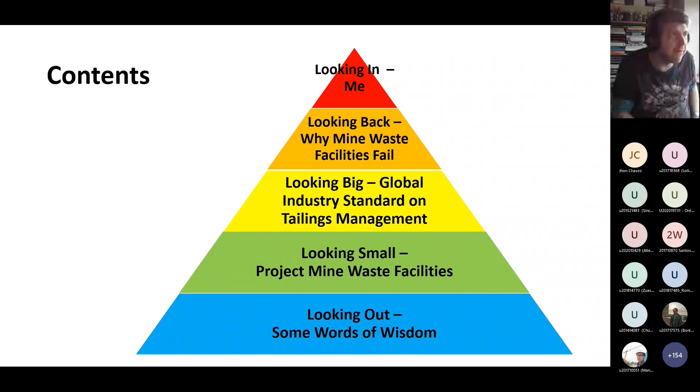I'm going to talk a bit about myself, an informal introduction, so you know I'm not just an engineer. I'll look back at why mine waste facilities fail, a bit about the global industry standard on tailings management, then why projects have mine waste facilities, and some words of wisdom I've picked up over about 25 years of experience that I'd like to pass on to you younger ones. You can use it on any geotechnical project. I thought it might be useful to pass on a bit of my grey hair to you.

A bit about me: I was born in 1971 in Northern Ireland. I grew up in Cornwall, a historical mining area in England, which had copper and tin mines, mostly underground. I moved around England and graduated in 1995 with a 2-1 degree from Camborne School of Mines. I'm married with one wife. I live in Kent, in Ashford, near London.

I'm called something in the United Kingdom a ground engineering professional. I'm a chartered engineer and a chartered geologist. I love football - my team is Liverpool. I love Liverpool, and I love science fiction, especially Star Wars.

I'm a geologist and I'm an engineer, and an engineer and a geologist see things very differently sometimes. An engineer sees things in numbers, a geologist sees things in pictures - very different mindsets. A geologist thinks a lot, an engineer likes to tinker around with problems. Geologists like uncertainty, things they don't know; engineers like order. So this helps me when I'm doing tailings management - I have to see both sides of the picture.

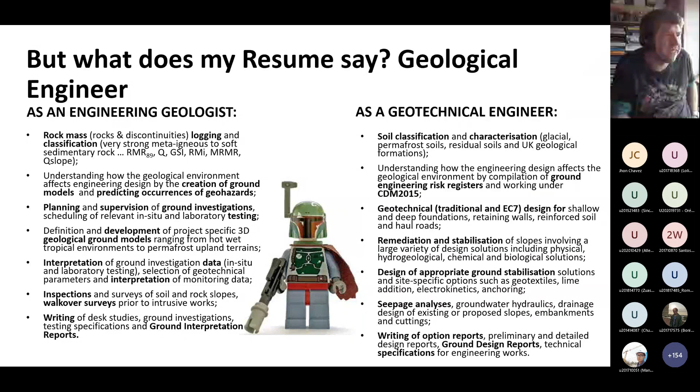As a geological engineer, I've done all sorts of things in my career: rock mass classification, planning ground investigations, ground models, remedial works, foundation design, piling, foundations, risk registers, seepage analysis, site supervision, writing reports - a bit like Boba Fett. We call it in the United Kingdom a jack of all trades.

I graduated in 1995, did some research into clay deformation and pastes and how they behave, did logging, worked in labs. Then I specialised in mining geotechnics, working on open pits, tailings dams, waste dumps and haul roads. I'm now specialising in risk and mining geohazards with Knight Piésold again - I joined Knight Piésold originally in 2001, left them, and now I've come back. I've specialised in mining geotechnics for about 20 years, and mining tailings dams for about 20 years.

But as I say, now I'm really focusing on the risk aspect. This talk's going to cover tailings dams in general, and the global industry standard on tailings dams - so looking back at why mine waste facilities fail.

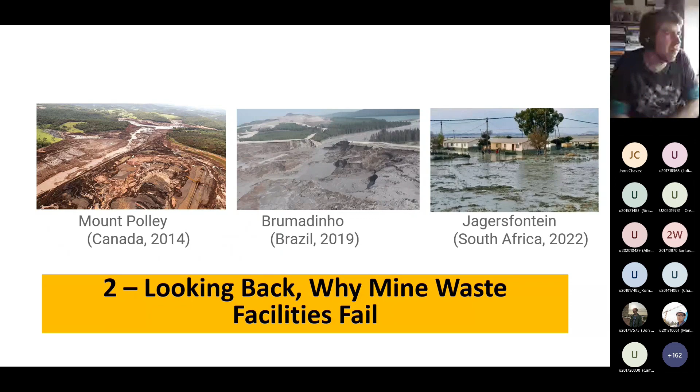We've heard all these stories in the press: Mount Polley in 2014, Brumadinho in 2019, and Jagersfontein in South Africa only this year. These are tragic cases, and we don't want anything like this to ever happen again.

So what are tailings? Tailings are the materials left over from the process of separating the valuable fraction from the uneconomical fraction - that is, the mine waste from the ore. They generally include fine-grained particles, chemicals, minerals, and water. Depending on the type of mining, tailings can be a liquid, a solid, or a bit of both.

Tailings characteristics can vary from project to project and deposit to deposit. It depends on the ore mineralogy, the host rock geology - it could be an oxide, a sulfide, a carbonate, or native minerals like gold or occasionally silver. The tailings characteristics can also depend on the ARD, the geochemistry, how high or low the pH is, if it's oxidized or reduced, and on the physical and chemical processes used to extract the valuable minerals - for example, if it's got cyanide in it, that affects the tailings characteristics.

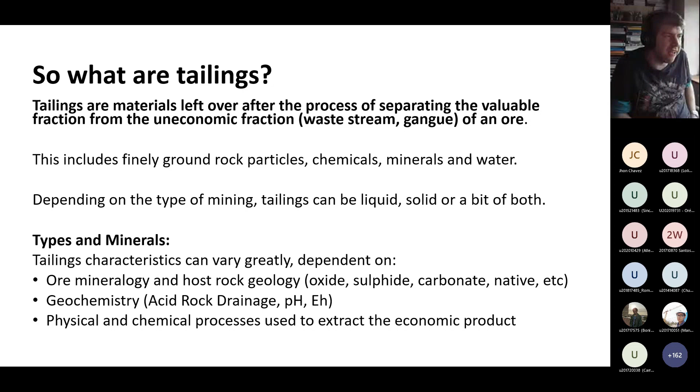As I said, we've seen all these cases in the press. When you've seen one tailings dam failure, you've only seen one. It takes more than one specialist to see why they went wrong, but there's no one solution to fit it all. We have to look at them individually, case by case. And when we design them, we do exactly the same. We can't just say we've worked on one project and copy it onto another. We can use ideas, but we can't copy everything word for word.

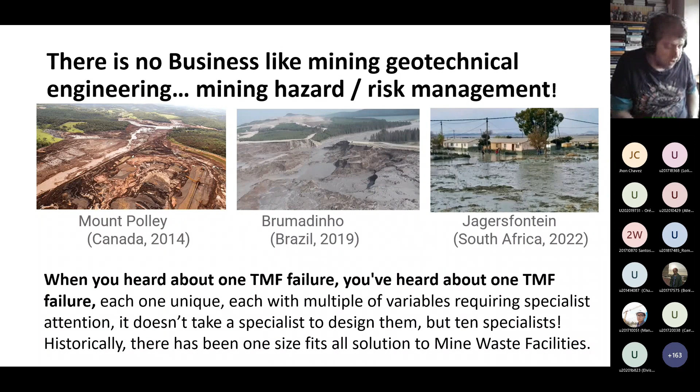So when you hear about tailings, where do you hear your news from? Do you hear it from your friends? Do you go to Google where everyone's talking about it and saying how bad tailings are and how bad mine waste facilities are? Or do you go to some unreliable sources on the internet saying again mine waste is bad? Or do you go to trusted sources?

There's a really good website I'd recommend to anyone interested in finding out more about tailings news. It's called Tailings News Alerts. They print about a monthly newsletter about all the news about tailings in the world.

So what makes tailings management facilities unique? Well, if you compare them to water retention dams or something like a reservoir, they're very different. Water retention dams, or WRD, the owner has a substantial amount of resources, that is, a lot of money available. They're viewed as useful, they're valuable, they store water. They're constructed in a single stage, and they have a finite operating life, year zero to the end.

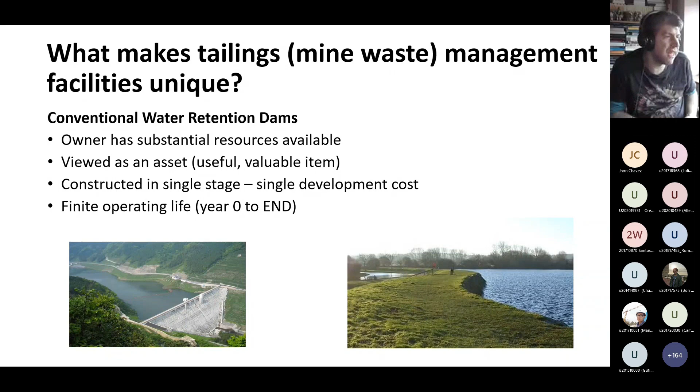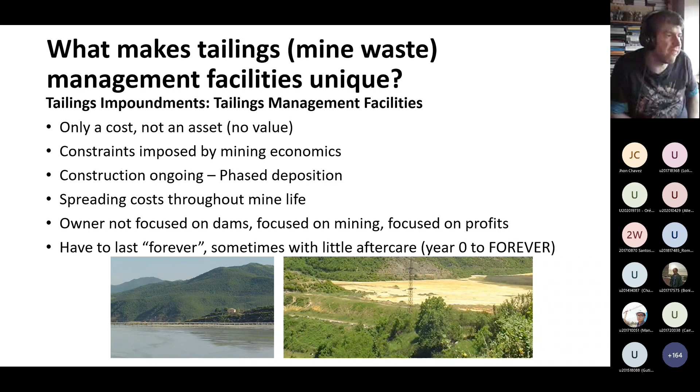But when we compare them to tailings dams, they're very different. Tailings dams aren't seen as an asset, they're just seen as mine waste, and they're imposed by the mining economics. Construction is ongoing - as you produce more and more ore, you produce more tailings. The cost spreads out during the life of the project. The owner isn't really focused on dams, they're focused on mining and on profits generally, and tailings is the last thing they really think about. And they should be designed to last forever - so it's year zero to forever.

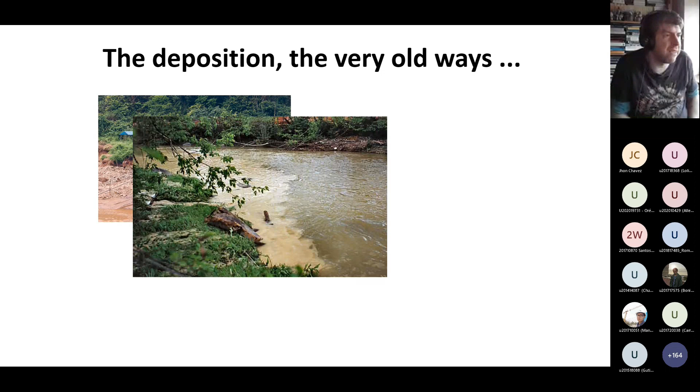So in the past there were very, very bad ways of depositing tailings, and these are some pictures. You can see all the mine waste going into the river, and then you get a failure like that, as we've discussed briefly.

So there are new drivers for modern tailings management. This depends on the economics of the mining venture and the protection of the environment, and these two drivers impact tailings management and the manner in which the tailings management facility is designed, constructed, operated, managed and closed. We do a lot about sustainable development now, stewardship of the land and the water. The type of tailings to be managed - note I say management, not storage, because it covers the water facility, the water engineering, as well as the tailings slurry or composition, not just the water piping. We have to understand a range of realistic alternatives of tailings management systems available and how they can be effectively utilised throughout the project benefits.

So there are many things that can go wrong on a tailings dam. They can be constructed with minimal control, with poor bedrock or poor foundations. They can be constructed too fast with an upstream method - we're going to come back to this later. They can be constructed too steep on a downstream slope, and I'll talk about that later. And they have a potential for failure in static liquefaction, seismic activity, or flooding. There's so many things that could go wrong, so when you design them you have to cover all these eventualities.

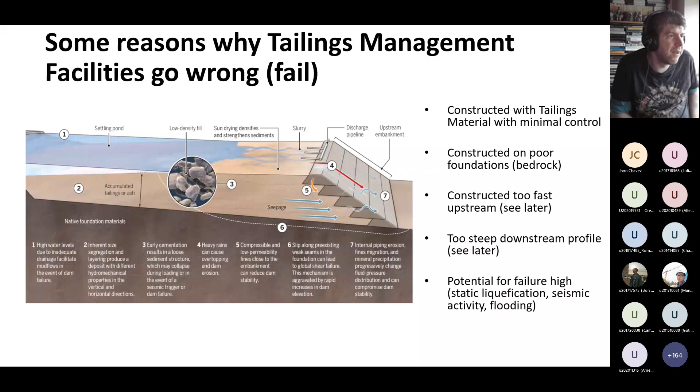All bad examples. We've seen Merriespruit in South Africa, 17 fatalities and 600 people injured. This is an incident in Hungary, another bad example.

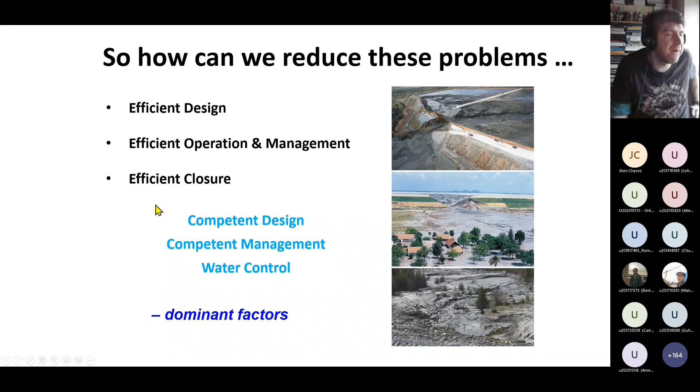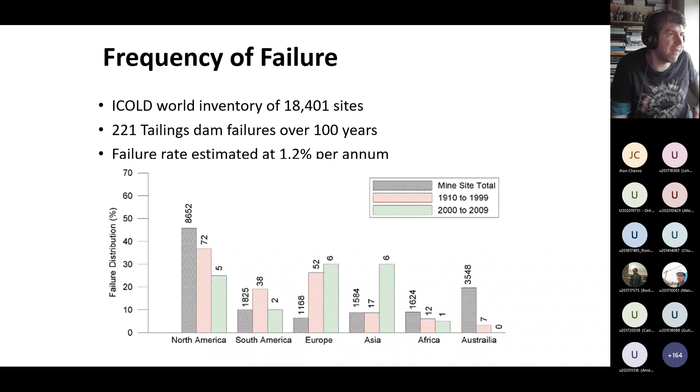The frequency of failure - this is quite an old report, but the statistics haven't really changed. There's about a failure rate of 1% per annum when you consider about 18,000 tailings sites.

These are all the main causes of tailings dam failure: foundations, slope instability, unusual rain, static seismic liquefaction, management and operation. But a lot of them are generally water controlled, so if we get a handle on the water, we have a good handle to minimize the failure.

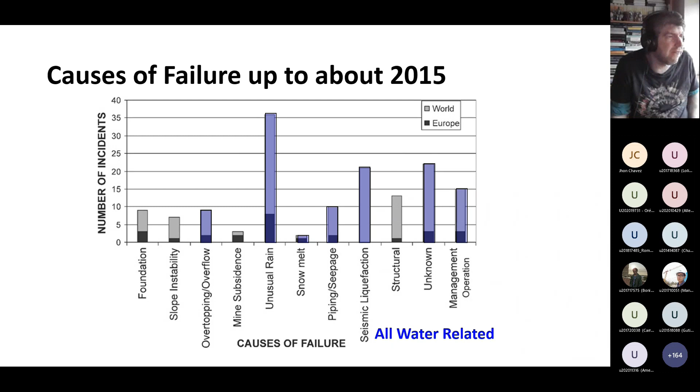So what these interim conclusions tell us - we have to understand the tailings dam design, we have to understand the regulations, and this is when we come into talking about this new standard, the GISTM. Education comes from good examples and common sense, coming back to basic engineering principles.

So now I'm going to look big and look at the global industry standard on tailings management. The global industry standard was really introduced about 2020, and I'm going to talk a bit about it now.

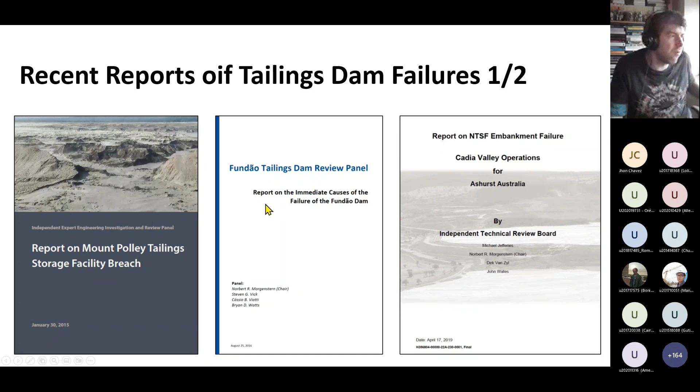Before 2020, there were a lot of high-profile reports, and as tailings failures happened, more and more reports got published talking about the causes, ranging from the Mount Polley reports, Fundão, Cadia Valley operations, and these all highlight why the tailings dam failed.

Other reports were published about 2019, talking about the expert panel on the technical causes of the failure. As I say, Mount Polley, Cadia Valley, all talked about foundation failure; Fundão, static liquefaction.

They used modern testing and analytical processes to model and back-analyze what happened. But then they wanted to look at the immediate causes. While there are immediate technical reasons why tailings dams fail, overall the technical and governance system of the tailings management is

the most important cause. That means the people who operate, not just the design issues. So it's incumbent upon the managers of the tailings facilities to develop a better understanding of the system to successfully operate for safety.

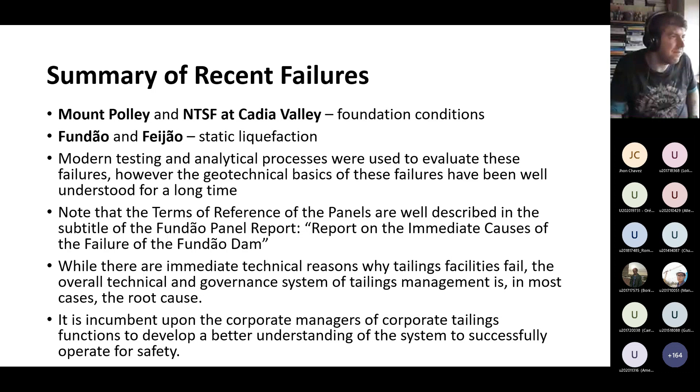So after Brumadinho, they found out that the company Vale - their operations were siloed, meaning people working in isolation. We said about the elephant - everyone was looking at things in isolation. And the company lacked transparency.

There was also independent review of the company structure, which found that bonuses of employees in the geotechnical area overseeing geotech safety were linked almost exclusively to financial targets, with safety goals representing a small proportion of the compensation metrics. That means they were more incentivized by money rather than looking after the safety of the facility. This was outlined in the report here.

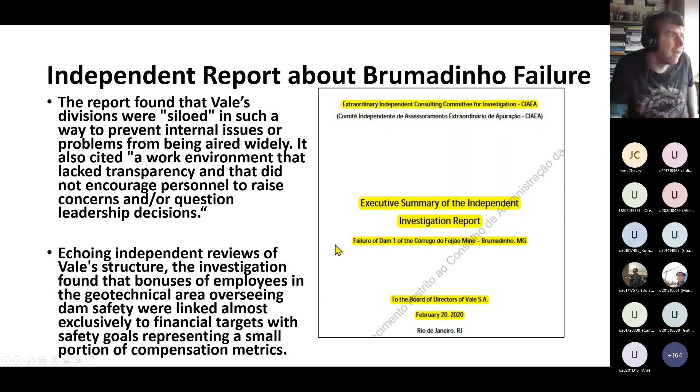Also, Mount Polley - another report was issued talking about the failure of Mount Polley, and they did a root cause analysis which drills down to get to the bottom of the cause of the failure. This root cause analysis is used to identify the specifics and interaction of various factors which played the most important role in the failure.

The outcome of the root cause analysis - the event and causal factor tree - is shown in the report. This is on the second illustration with the blue, yellow, red and green circles, and it just tries to highlight what was the root cause and the main important cause.

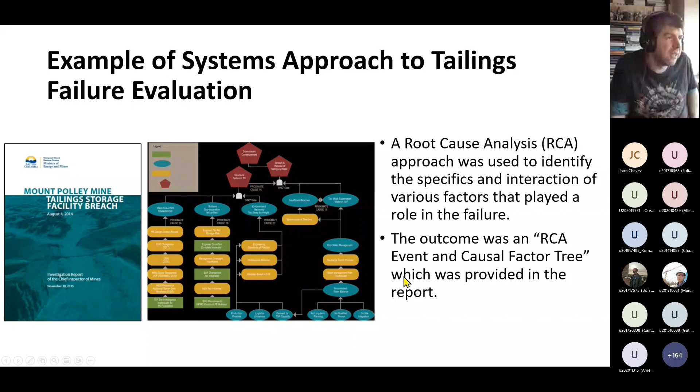As a consultant, I help design, manage and construct tailings dams. I help to eliminate, select, refine, design and construct. As the project progresses, we start from about 30% to 50% accuracy, ranging down to 10-15% accuracy. This stage has various options, from a full range of tailings management facilities down to one or two options for the client to select which they feel is best.

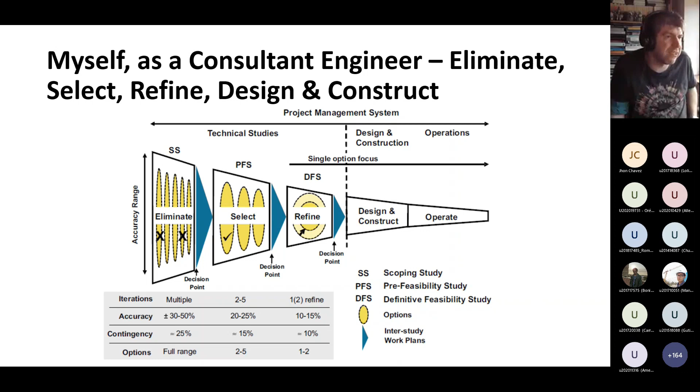Secondly, ask yourself what is really important to a mining project. This comes out to anyone who's working on a mining project.

There have been case histories in the past that led the global industry standards to say there are things that are constraining the complex system. These are economic boundaries, safety boundaries, and workload boundaries. If you work within these, decision making within these constraints may contribute to failure.

If you're pushed for costing, your quality may be jeopardized. If your time is compromised, your quality may be jeopardized. So if you try to get something too cheap, you may get bad quality. It's about getting that balance right.

As a consulting engineer, I find it very demanding, frustrating, but rewarding with these constraints. Demanding because it occupies most of my time and concentration. Frustrating because I would usually work with incomplete data or a very small sample size, where someone's just sampled one bit of tailings, saying that it represents the whole of the tailings area.

It can be rewarding because I'm using my passion and my talents to the full. And I keep having to remind myself not to panic.

Tailings dams are considered complex systems. This was first coined by an author in America, a pioneer originally called Sidney Dekker. These characterize why a tailings dam may fail, and this led to the Global Industry Standard on Tailings Management.

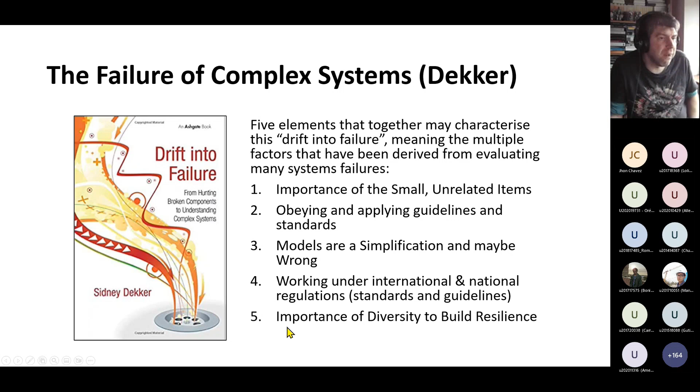What's the most important bit? They talked about the importance of small, unrelated items, obeying and applying guidelines and standards. Models are a simplification and may be wrong. Working under international and national regulations, standards and guidelines. And the importance of diversity to build resilience. I'm going to talk about these next.

Importance of the small, unrelated items: a series of small, apparently unrelated decisions may long-term significantly impact the outcomes of a system, and they are usually misunderstood and neglected. For example, in the United Kingdom, we have a lot of plastic straws or rubbish in rivers and seas that build up and pollute the environment, destroying ecosystems. It's these small things that affect the big things, but they may all be seen as unrelated items.

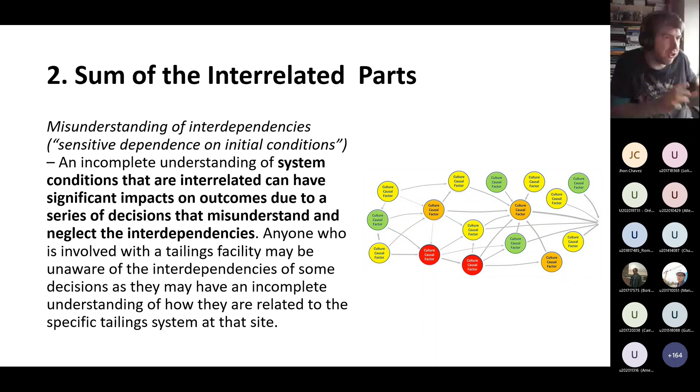Secondly, it's the sum of the interrelated parts that make a complex system - conditions that are interrelated and can have significant impacts on outcomes due to a series of decisions that are misunderstood, neglected, and neglect the interdependencies. You can see by this drawing there are so many circles linking to other circles. In a tailings dam there are so many things interlocked that you have to think about the big picture, not just things in isolation.

Models are a simplification and may be wrong. There can be unknowns and effects that are not effectively evaluated due to incomplete information or other factors. Models can't capture everything, they're just a simplification of reality. For example, we could do a slope stability calculation: factor of safety equals the resisting forces divided by the sliding forces. Just a very simple calculation.

So tan phi over tan beta - the tan of the angle of resistance over the tan of the slope angle. Or we could do a very simple spreadsheet to get a factor of safety. But we may not have enough data, just a simple observation. We could do limit equilibrium analysis of a tailings dam, or finite element analysis. But we still have to remember models are a simplification and may be wrong.

As someone once said, all models are wrong, but some are more useful than others. For example, I would do the very simple calculation, tan phi over tan beta, just to get an approximation, but it would not be as good as a more complex model - it depends on the quality of data, cost, and how much data I have.

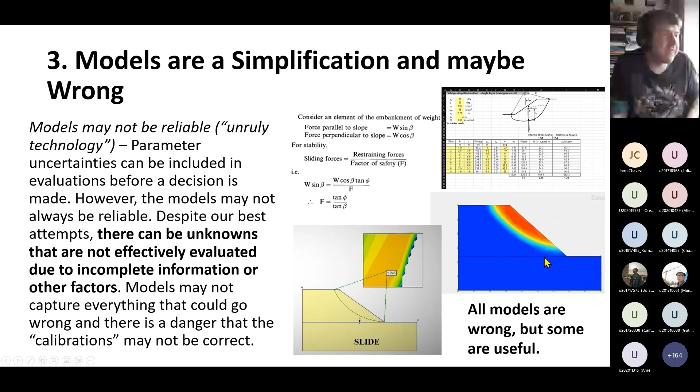As a consultant working on mining projects and tailings dams, we have to obey international and national regulations. These are measures and procedures that must be identified and applied in the day-to-day approach to the management of complex systems, like a tailings dam.

The importance of diversity to build up resilience. With diversity, the larger number of perspectives to view a problem comes up with better solutions, and probably we're more likely to derive a correct answer the more people we ask, and get consultation involved.

As a tailings dam fails, it's something called a normalization of deviance. This is any significant departure from what is considered normal. So if we're going true north and walking instead by magnetic north, we are going to deviate several degrees off our target. Therefore, the behaviour that departs from north, i.e. departing from what is standard, becomes typical for a given situation.

Normalisation of deviance suggests that the unexpected becomes the expected. We must learn from other sectors and other industries, such as aviation, NASA with the space shuttle accident, healthcare, and shipping accidents. We can't just limit our safety management approaches based on tailings management.

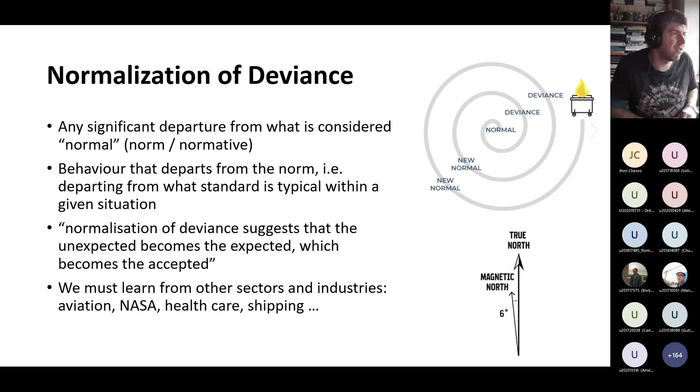Mine tailing systems are complex systems and have so many dependencies, things related to one another, competitors, relationships, and interrelationships. It can be dependent on the performance, interconnections, environmental impacts, the variability, the safety, the price. There's so many things that contribute to a complex system.

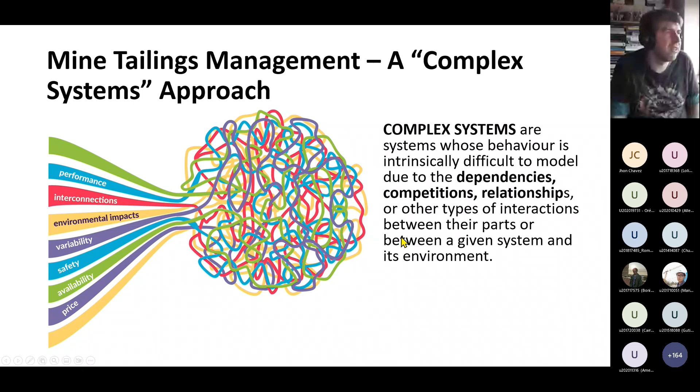Back to what we were talking about, the global industry standard on tailings management. This was compiled during the Global Tailings Review Report project. It's in various languages ranging from English, Spanish, Portuguese, French, and Chinese. So there's no excuses not to read it.

There are 3 conveners: the International Council on Mining and Metals, the United Nations Environment Programme, and the Principles for Responsible Investment. It first came out in 2020, that's version 1, and there's going to be another revision this year or next year.

The ICMM, which is the International Council on Mining and Metals, have specific targets to reach.

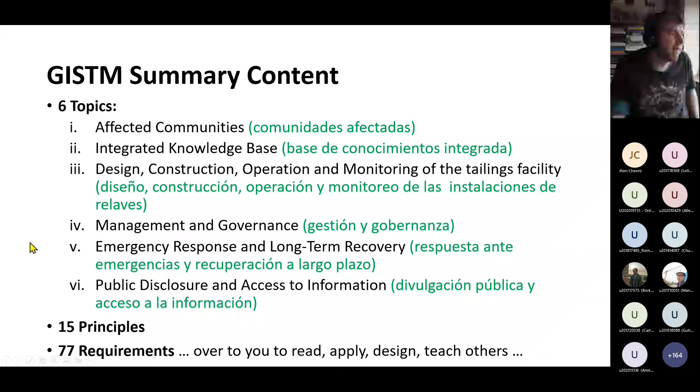So, topic 1 talks about affected communities. Respect the rights of project affected people and meaningfully engage them at all phases of the tailings facility's life cycle, from when the project becomes a concept to closure.

Topic 2 is an integrated knowledge base. Develop and maintain an interdisciplinary knowledge base, so that everything is related together, to support safe tailings management throughout the tailings facility's life cycle, including closure.

Principle 3: use all elements of the knowledge base, the social, the environmental, the local economic, and technical, to inform your decisions throughout the tailings facility's life cycle, including closure again.

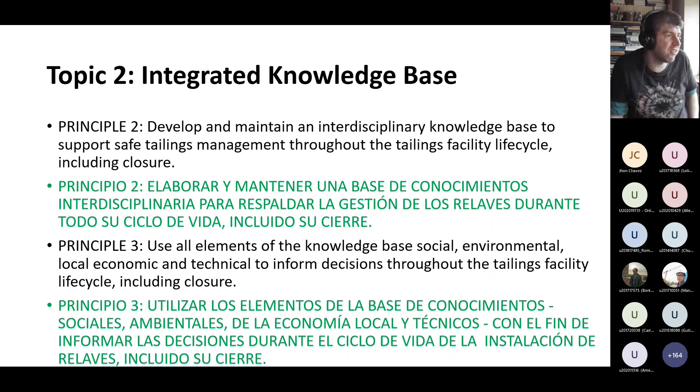Topic 3: design, construction, operation, and monitoring of the tailings facility. Principle 4: develop plans and design criteria for the tailings facility to minimize risk for all phases of its life cycle, including closure and post-closure. Principle 5: develop a robust design that integrates the knowledge base and minimizes risk of failure to people and the environment for all phases of the tailings facility's life cycle, including closure and post-closure.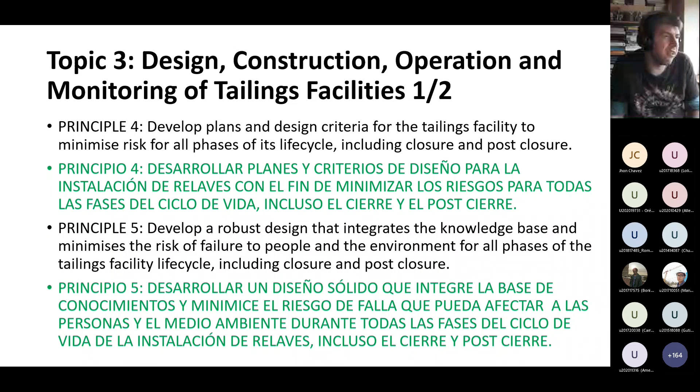Topic 3 again, design, construction and operation monitoring of tailings facilities. Principle 6: plan, build and operate the tailings facility to manage risk at all phases of the facility.

Principle 7: design, implement and operate monitoring systems to manage risk at all phases of the facility life cycle, including closure.

Topic 4 talks about management and governance: establish policies, systems and accountabilities to support safety and integrity of the tailings facility.

Principle 9: appoint an engineer of record. That's employing a consultant to help the mine operate in a safe and effective way.

Topic 4 continued. Principle 10: establish and implement levels of review as part of a strong quality and risk management system for all phases of the tailings facility's life cycle, including closure again. You can see closure is so important, not just the operating of the mine.

Principle 11: develop an organizational culture that promotes learning, communication, and early problem recognition.

Principle 12: establish a process for reporting and addressing concerns and implement whistleblowing protections. So if someone spots a leak or a burst pipe on the tailings dam, there is a safe mechanism for someone to report a problem without having any repercussions from management.

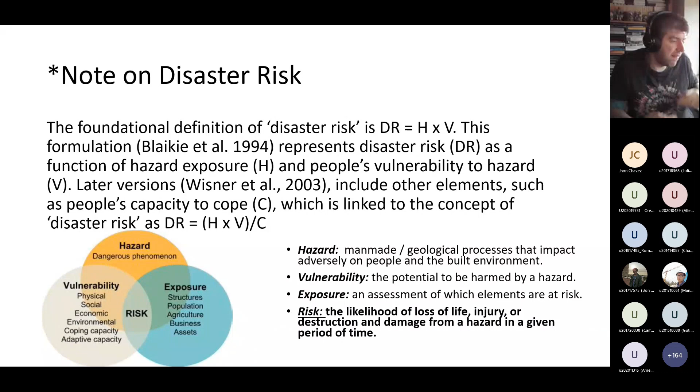So it's not just a simple probability of an event happening multiplied by the impact of the consequence. When we look at risk, we look at risk on various aspects. So risk isn't generally always seen as just probability multiplied by consequence.

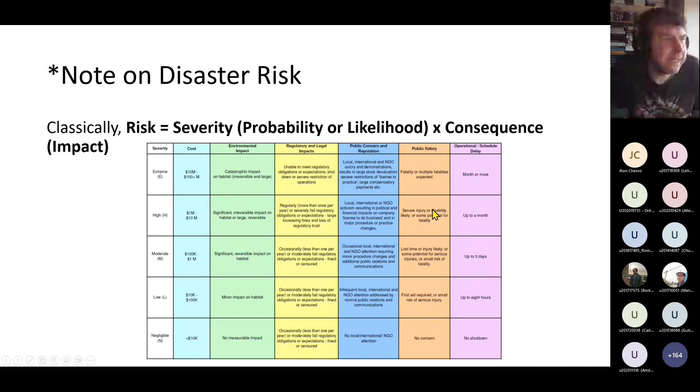We can see risk impacting the cost in the pale blue, the environmental impact, the legal aspects, the public safety, and how much it's going to cost the mining operator.

So we need something called a safety management system, and it's not just simple risk management. This talks about safety governance, which oversees the mining operation and the tailings operation, the safety organisation - making sure that's in place - a system safety programme, and a safety culture.

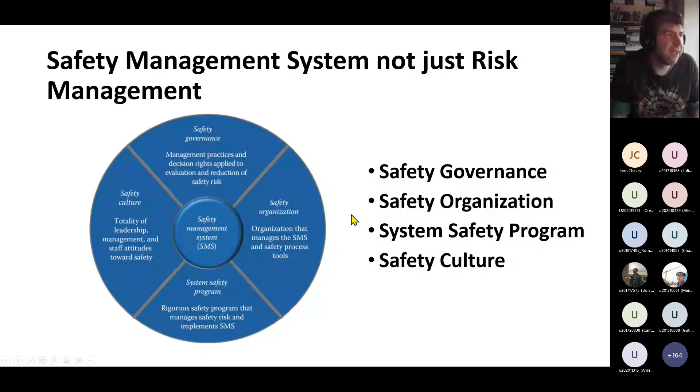When we look at a tailings dam, we have to look at the most credible failure modes and scenarios, given the materials present in the structure, its foundation, their properties, their configuration, how the tailings dam has been constructed, the drainage conditions, the surface water, and throughout its project life.

The credible failure modes can and do typically vary during the lifetime of the tailings facility. A facility that is appropriately designed and operated considers all these credible failure modes and includes sufficient resilience against each of them. Different failure modes will result in different scenarios.

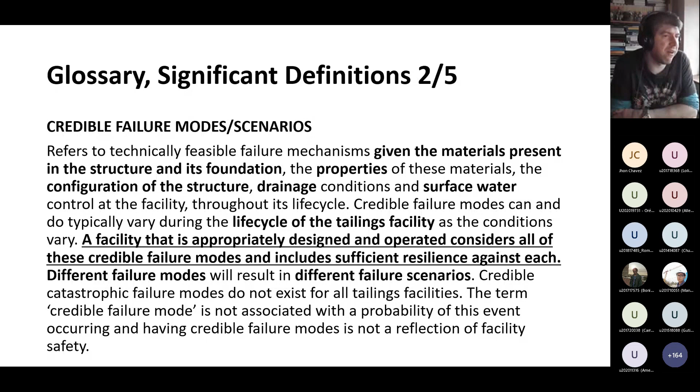Credible catastrophic failure modes do not exist for all tailings facilities. And finally, it is not associated with the probability of the event occurring, and having a credible failure mode is not a reflection of facility safety.

So what sort of things can happen? As I said before, a tailings dam has about four key main failure modes: overtopping, mass movement, internal erosion, or surface erosion. From those four main failure modes, you can get adverse conditions, and there are various signs you can look at when you're doing a site inspection or when operators are doing their work.

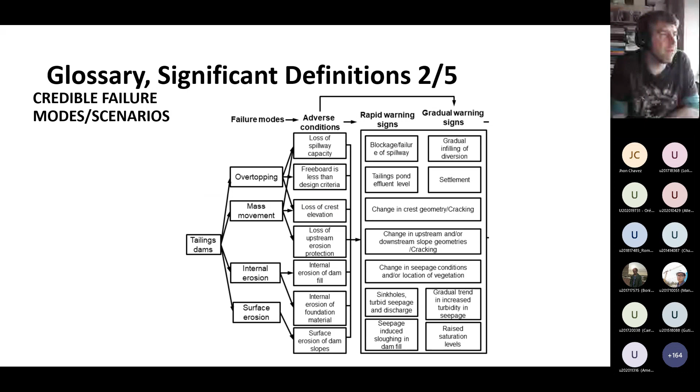As a consultant, we have to help clients do design basis reports. This provides the basis for the design, the operation, the construction and monitoring, and the risk management of the tailings facility. We talked a lot about the knowledge base on the introduction to the GISTM. This is the sum of the knowledge that's required to support the safe management of the tailings facility throughout its lifetime, from concept to closure.

The knowledge base has an iterative nature. That means it changes, it doesn't just keep static. It needs to be updated when the need arises and the context changes. It's based on detailed site characterization, baseline knowledge of the social and environmental context, as well as the design, construction, and performance monitoring. And it should end with data collected as the project evolves and knowledge evolves.

The Global Industry Standard on Tailings Management also mentions a lot about the observational method devised by Peck in 1969. I'll just explain what the observational method is. It's the proactive assessment at the design stage of every possible unfavourable situation that might be disclosed or identified by the monitoring programme, and the development of an action plan to mitigate or reduce the risk in case the unfavourable situation is observed. So you're trying to reduce that risk or hazard before it actually happens.

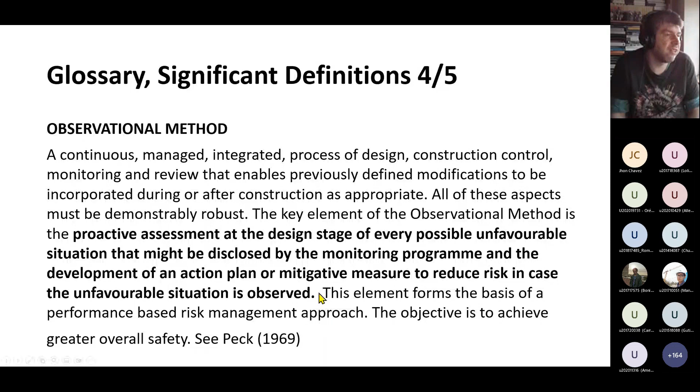Other definitions: preliminary design. For the purposes of the standard, preliminary design is a design performed at a level sufficient to determine the differences between the viable designs that adopt different external loading design in terms of required footprints, volumes, and drainage requirements. And we aim for safe closure.

A safe closure talks about a closed tailings facility that does not pose ongoing material risk to people and the environment, which has been confirmed by an independent tailings review board member, and it has to be signed off by an executive.

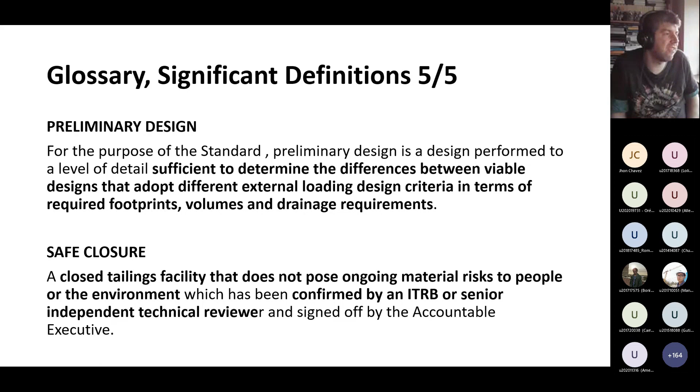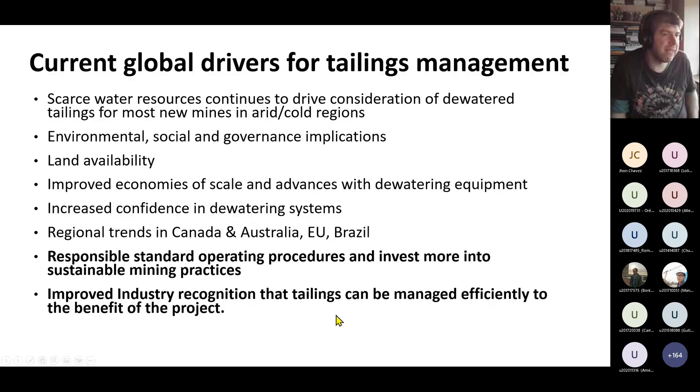So looking a bit about tailings facilities generally, what are the drivers? Scarce water, environmental, social, governance implications, land availability problems, economics, confidence in dewatering systems, regional trends in Canada, Australia, EU and Brazil are driving tailings management. And there's more and more responsible mining operators now, and they want to invest in best practice. And improved industry recognition that tailings can be managed efficiently, benefiting the project and their reputation.

Questions to ask yourself at the start of the design: what's the tonnage? What are the environmental constraints? How much water is available? What is the climate? What is the topography? Is the area subject to earthquakes? Do the tailings have any potential for acid mine drainage? What is the geotechnical characteristics and properties of them? Are there permitting requirements? What is the construction material? Where is it sourced and where is it from? What about closure? Can you just dump it? I don't think so.

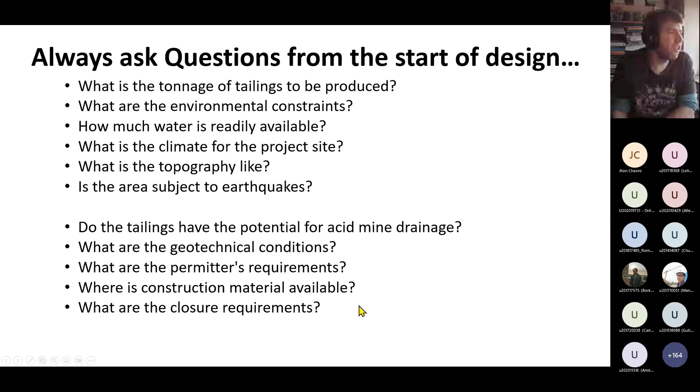But let's look at water. Water controls tailings and how you deposit tailings. You could deposit as a slurry and build a tailings dam, or you can do thickened tailings or paste as a sort of dam, or you can decide on filtered tailings, which is a dry cake. They both have very different properties and very different ways you deposit them, and they have different impacts, like different seepage issues and different costs.

But as you see, slurry has less water... has more water than a filter cake. So tailings slurries talk about 25 to 30% solids, 25 to 30% pulp density, and then when you have a pulp density in a filtered cake, you have about 65 to 70% solids.

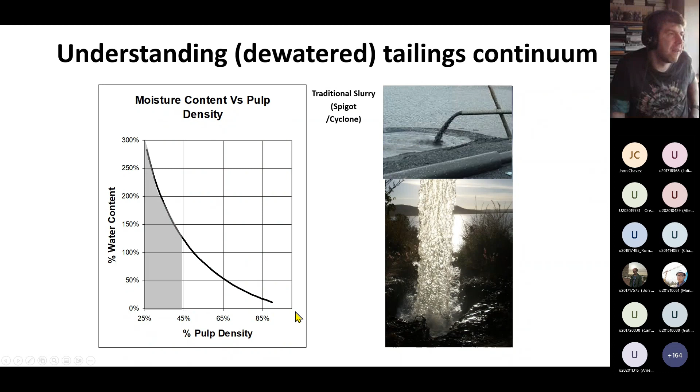You could build a tailings dam for slurry from an upstream. This is an upstream tailings dam. This is highest risk, suited for low seismic areas. It's not recommended for water areas where you've got water bearing materials and high saturated materials. Based on rate of rise about 3 to 5 meters per annum, they're not suitable for areas with static liquefaction potential. These are very high risk, and in some areas, like Brazil, they're not legal to build.

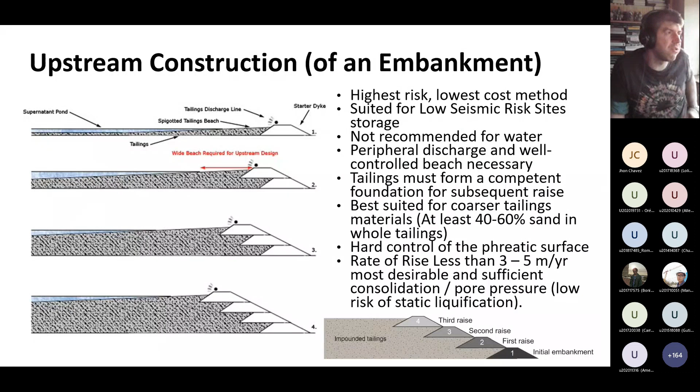Downstream is another form of construction for slurry deposition. These are low risk, high cost. You are more suited for high seismic areas. Each raise is founded on the natural ground, suited for any types of tailings, drainage within the dam, and rate of rise is unlimited.

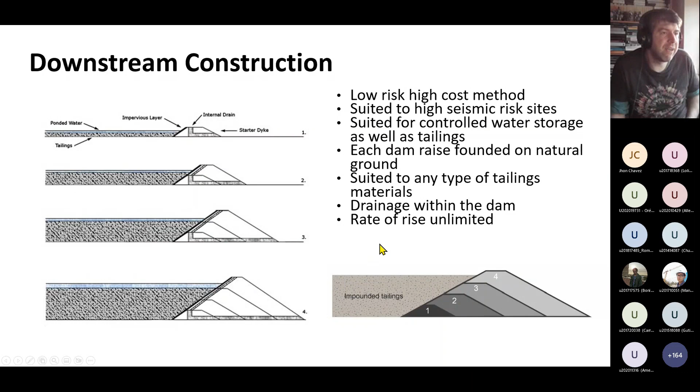Centerline construction is another form of slurry construction. Medium cost, they're acceptable in seismic areas. They're not recommended for permanent storage. Peripheral, so that's at the sides, discharge, wide beaches. They have drainage within the dam, and they have height restrictions generally.

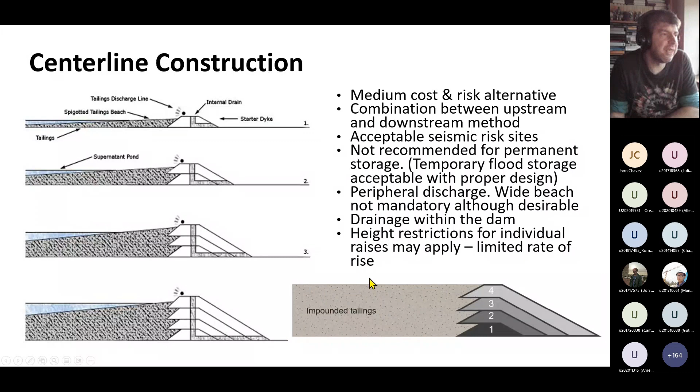Tailings filtered are usually almost like a landfill. They're just building up. So it's just like an earth embankment of tailings, but maintained in a safe manner.

When we look at tailings, as a consultant I look at them at various stages of a mining project, ranging from the scoping conceptual stage down to detailed design. Each has different levels of accuracy, from say 2% down to 50% to 100%, and that's how much effort we have to put in. But with that level of effort, we still have to put a contingency, which is the level of uncertainty.

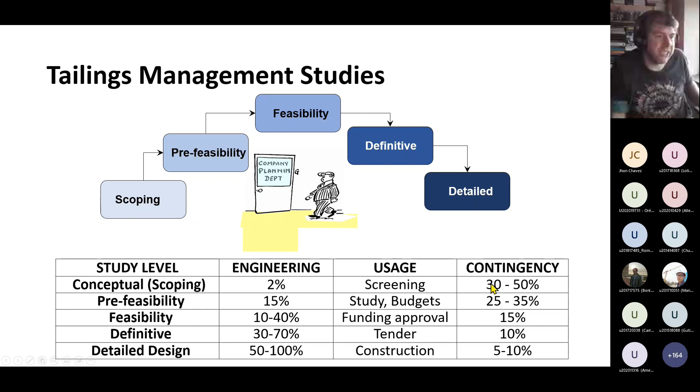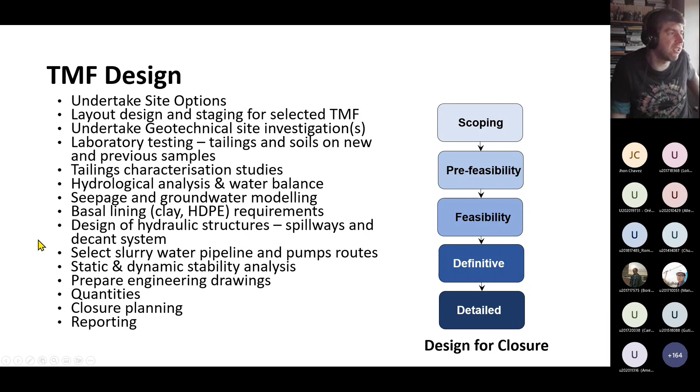I say we have to design for closure because this is just as important as the operation. You may have a perfect project, but if it hasn't got a good closure plan, it may not get the go-ahead. So, site selection.

We need to understand the project, national legislation, the environment, and the material properties that are going to be deposited. It depends on good teamwork between geotech engineers, the environmental teams, geologists, and project teams. When we look at project site selection, it has to incorporate all aspects of the mining cycle: construction, commissioning, operation, and closure, and how it generally fits into the project site.

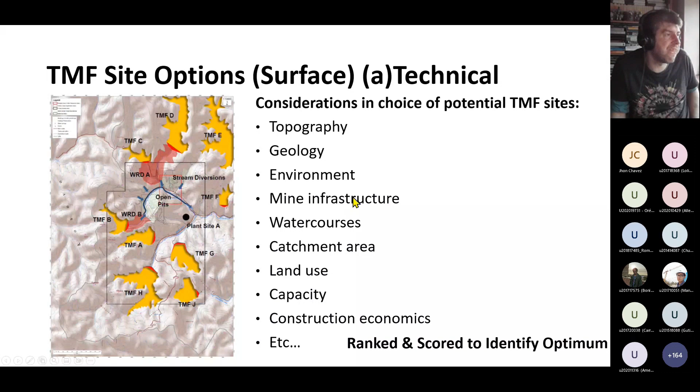Then the environmental team come along and do the same. They rank each site based on proximity to locations, villages, catchment areas, vegetation, land use, ownership, mineral rights, visual impact, water courses again, impact on water supply, local ecology and archaeology. From that, we can find the optimum site.

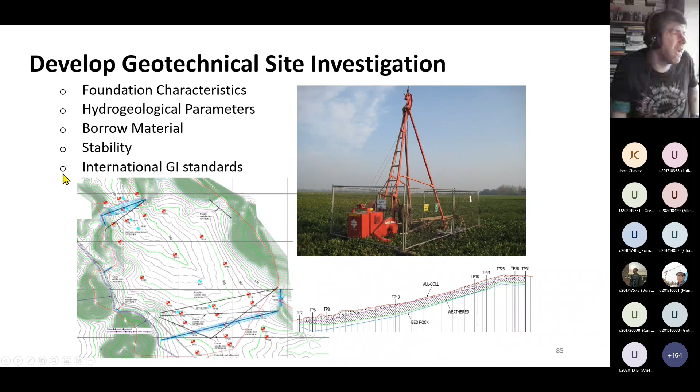When we design a geotechnical site investigation for a tailings dam, we have to consider the foundation characteristics, the hydrogeological parameters - so that's like the groundwater level, how much water can come out of the ground - borrow material, which is the source of build material, and the stability of the ground, based on international standards.

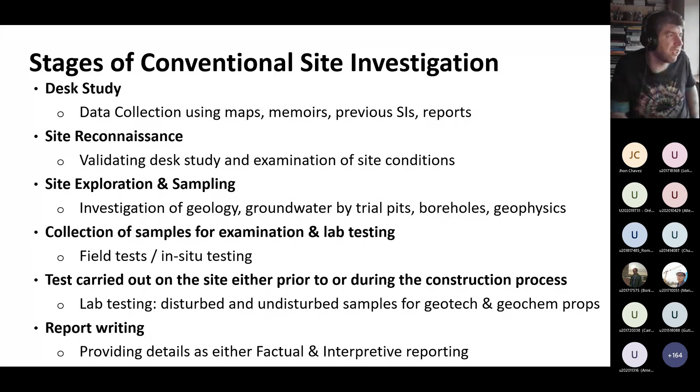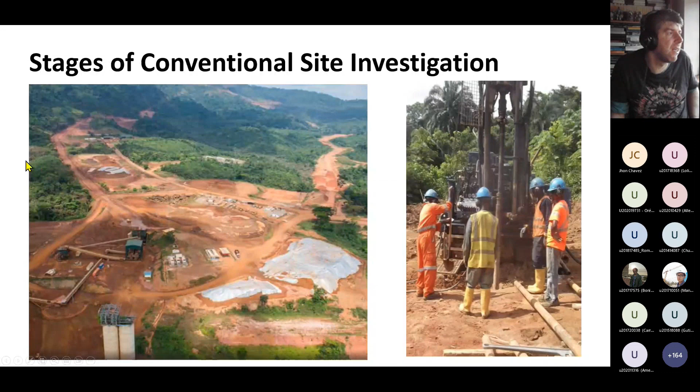So typical ground or geotechnical site investigation field tests we use: in boreholes, we use SPTs and permeability testing. When we're in the basin or footprint of the tailings dam which is going to be developed, we can use CPT, Mackintosh probe, CBR, vane testing, and dynamic cone penetrometer. These give us information about strength, and they help correlate with other properties.

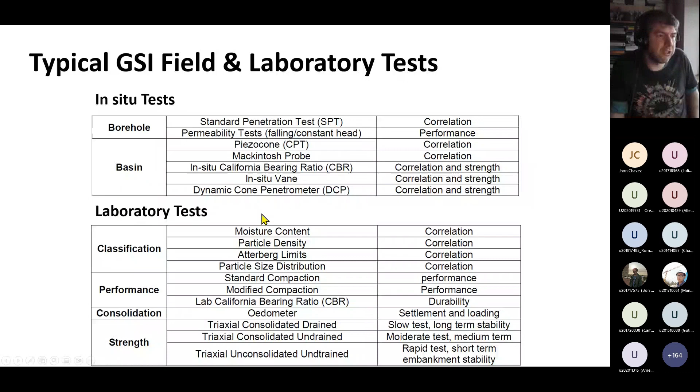When we get samples from the boreholes collected, we can do a range of testing from classification, performance, consolidation, and strength testing. These help us derive settlement and rapid to short and long-term stability properties.

At this stage, the mine has some idea of what the tailings is going to be like, so we can do a lot of testing. We can do classification testing, which is very similar to soil mechanics testing - moisture testing, particle density, Atterberg limits, particle size distribution. For deposition, we can do shrinkage testing and specialist testing called air drying testing, settling tests.

And then we can do permeability, oedometer testing, triaxial testing in various forms - consolidated drained, consolidated undrained, shear box, lab vane. We can also do rheological testing like viscosity and slump testing to see how the tailings is going to behave.

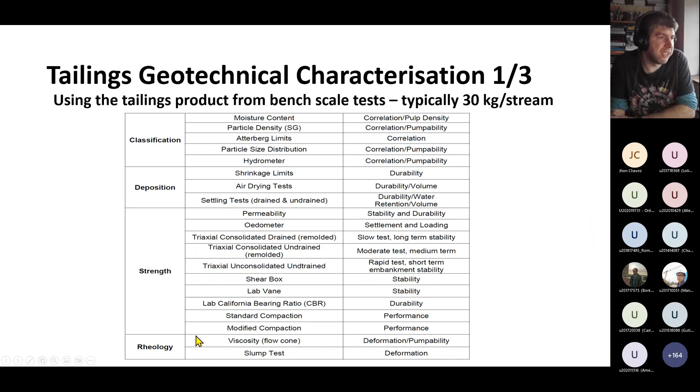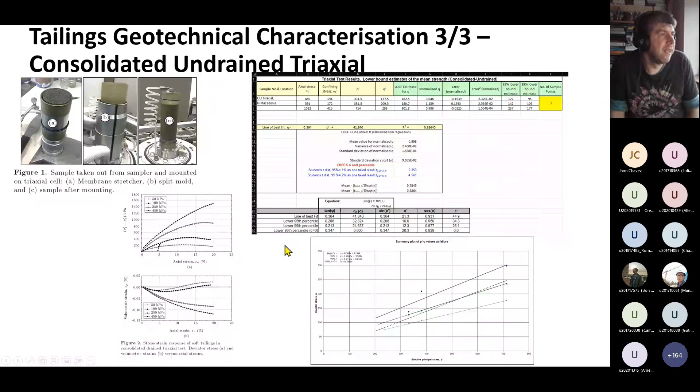We get all sorts of charts like PSD charts and settling charts. We do typical analysis of the triaxials, consolidated and drained, to see how it's behaving. We can get specialist geochemists involved to see how it's behaving geochemically.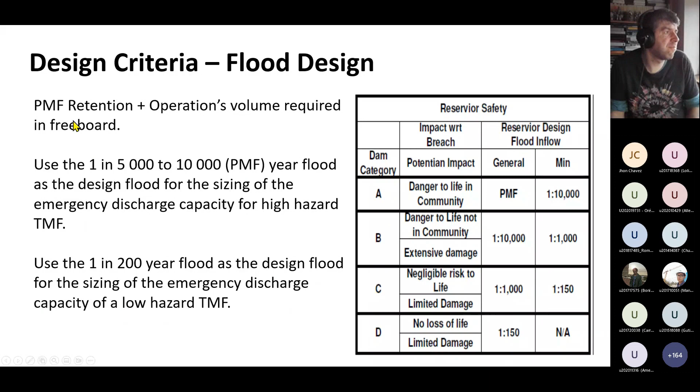Then we come up with design criteria based on the flood return - the probable maximum flood retention. This is the operation's volume required in freeboard, which is the amount of free water available from the surface to the dam level. So we use return periods to see the maximum flood and how much the dam would potentially flood.

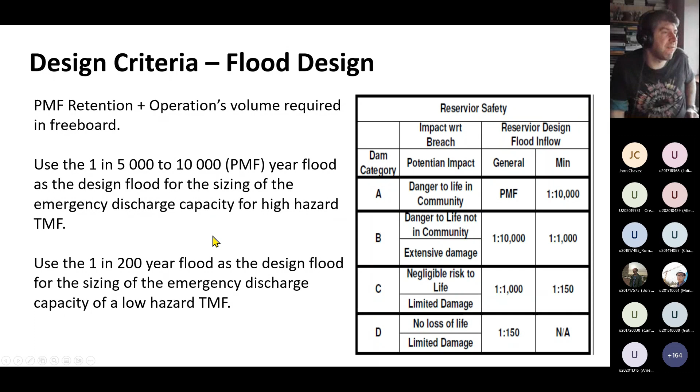This talks about the event again - whether it's a low event or a high event, we have a return period of various stages, and we have to design for all these eventualities, from a 1 in 200 to a 1 in 10,000 event, to make sure the tailings dam doesn't flood. We have the same thing for seismic criteria, from low to extreme.

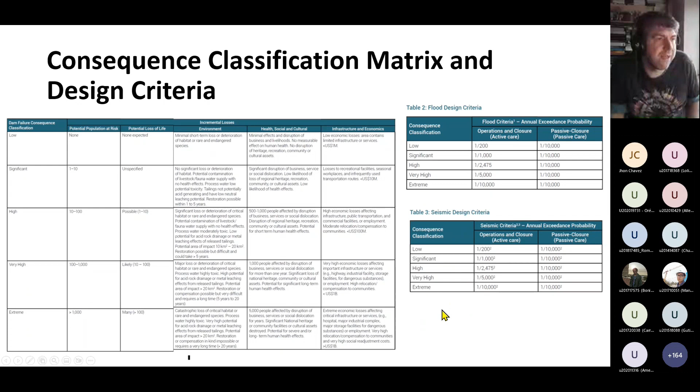When we do a seismic hazard assessment, we can initially do a preliminary analysis based on internet searching of the local area, or we get a local expert to do a seismic assessment for us. When we do a seismic analysis, we usually base it on an operation basis earthquake or maximum credible earthquake.

Then we can derive the mine waste facility class. This could range from low to extreme based on these return periods, and this is all dependent on the loss of life and the environmental consequences we talked about earlier.

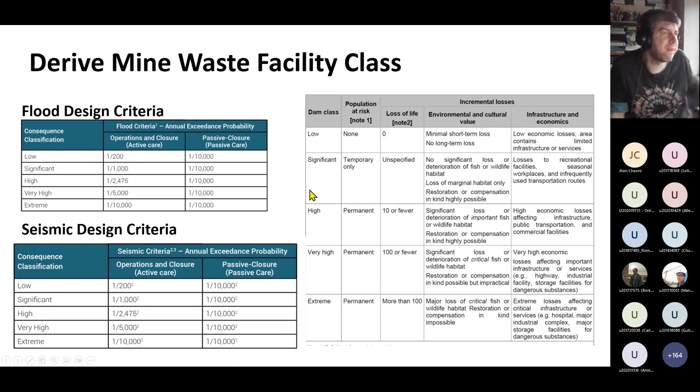Then other team members will develop a hydrological assessment. We can set up rain stations as soon as possible to understand rainfall trends and abstraction points, and commence collecting meteorological data from local organisations. Water is critical to the project.

We take advantage of exploration drilling to obtain information on water levels, material properties, and potential construction properties, so we do pumping tests. We also take advantage of condemnation drilling - that's drilling outside the remit area but has been abandoned - to provide reliable information on water levels within the environs of the tailings dam.

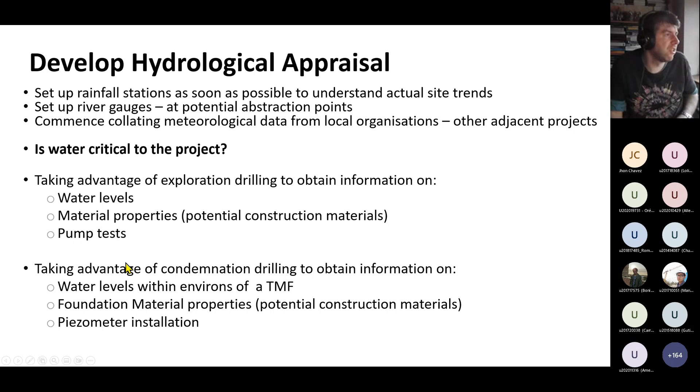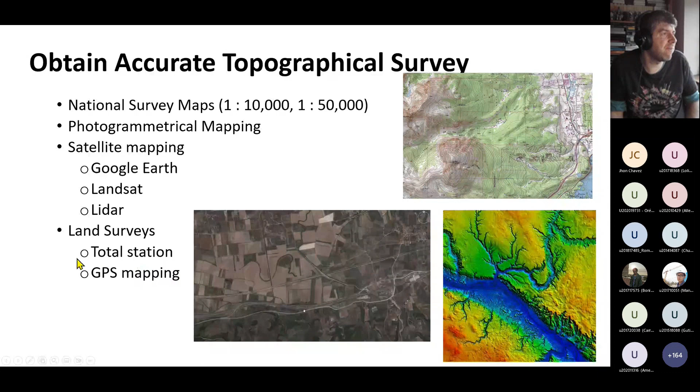We can take advantage of foundation material properties to understand how the groundwater is, and we can use piezometers. We need an accurate topographic survey, so we use maps at various scales, 1 to 10,000 to 1 to 50,000, photogrammetrical mapping, satellite imagery, and local land surveys.

We develop depth capacity, which tells us how much tonnage is going to be placed into the dam and the total tonnages being placed. We understand the pulp density from this, and the dry density, and then we need a good map. I've just outlined the stages here.

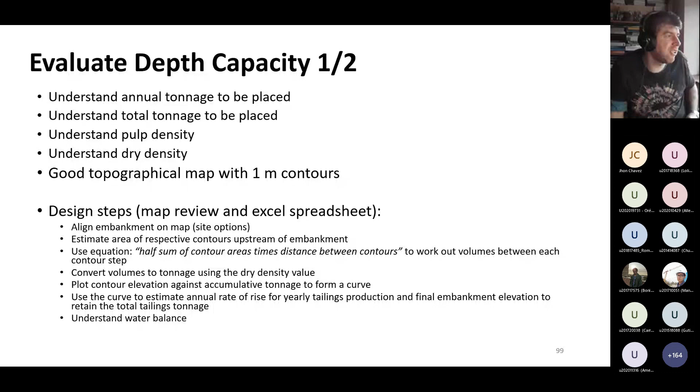When we do a basic slope stability analysis, as I said before, we have to do it on the maximum design earthquake or an operation basis earthquake.

A basic slope stability analysis is based on material properties, usually from in situ testing - CPT, or laboratory testing like CU triaxials, direct shears, or cyclic direct shears. Preferably we use CPTs as they're more reliable, but if we don't have lab testing, we have a body of knowledge from other consultants in our company to help advise on properties. We use our engineering judgment, based also on the quality of the data.

We assess the peak and residual strengths, not just the cohesion and friction from one quick triaxial. We determine the critical slope and failure mechanisms. We define the slope model - the geometry of the slope to be analysed, the materials and types of occurrence - focusing on the prism, which is the wedge of the built material.

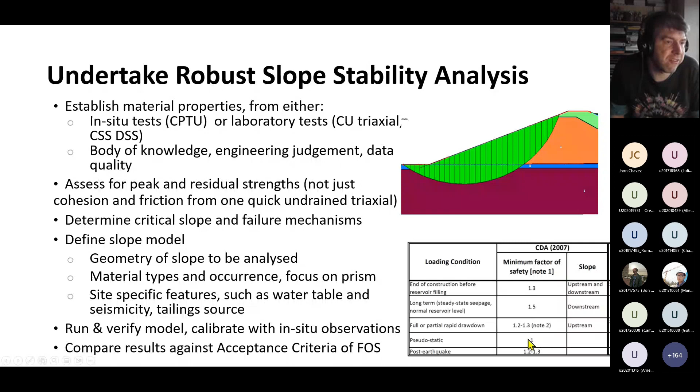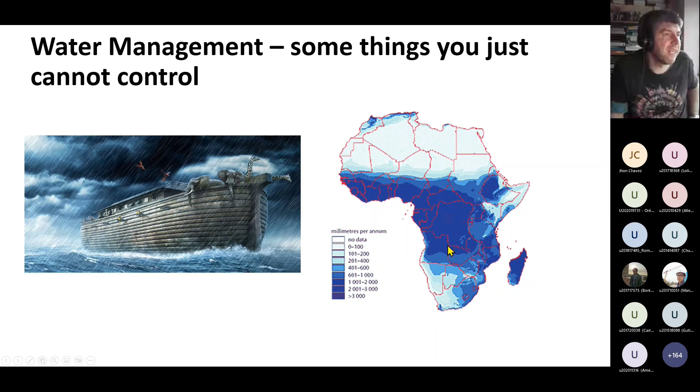Water management involves developing a good water balance. This covers all the water - how it goes through the facility, comes in and out, the inputs and outputs - and how you manage the flow through the system. We also talk about decant towers and how they're going to be used.

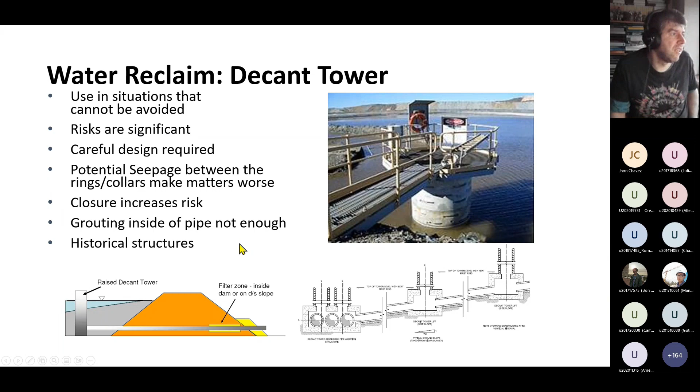Then we talk about the decommissioning and closure of the tailings facility. We want to prevent long and short-term environmental contamination. We want to ensure physical and chemical stability at closure and post-closure. We want to maintain resilience to climate change and its various effects, and we want the area to be sustainable.

So we want it to cover the 4 E's: equity, environmental, economy, and engineering. You want all those to be covered.

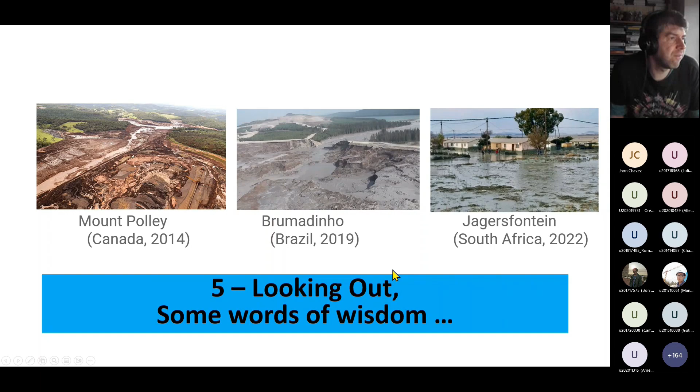So looking out, some words of wisdom I hope to pass on. When you want to become a competent engineer - and I'm still growing after 25 years - you want to develop your skills, take on challenges, feel recognised, feel respected and appreciated by others, progress, achieve things, and have opportunities. These all help you develop your competency with time.

So top tips I'd like to pass on to one and all here. Have a curious mind and learn something new every day. Number 2, share your knowledge with others - this is so important for your advancement, and it gives you confidence to share what you know. Number 3, skills - it takes about 10,000 hours to master a skill.

So like some organisations, societies and professional bodies say it takes 7 years to be chartered - 10,000 hours is about that amount of time to become a professional engineer, a chartered engineer, to be a master of that skill. But I would say it takes a whole lifetime.

Number 4, broken pots can be repaired with precious gold. When you've had a bad experience, you can learn from it and make something good out of it. If you had a bad site investigation, or a test result go wrong, or a bad analysis, you can learn from that and hopefully take something good from it and build on it for another project.